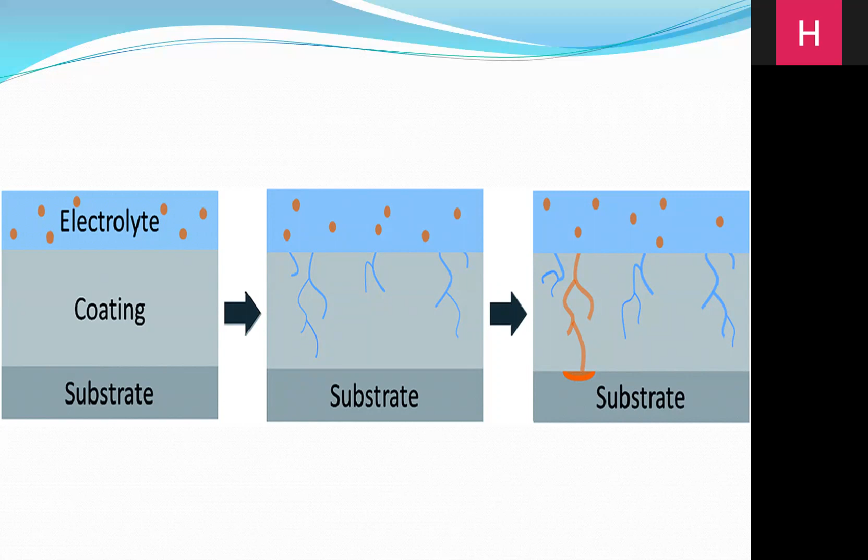Coming to the next slide, organic solvents perform several functions. They dissolve the resin, control coating viscosity and evaporation for film formation, and affect film adhesion and coating durability.

Other additives and fillers provide coating uniformity and improve coating flow, surface drying, or decrease the permeability of water and oxygen. Metal surface pre-painting treatments such as phosphate and chromium conversion coatings are applied to increase adhesion and the strength of the organic coating.

Before applying the top coat, it may be necessary to apply a primer coat. If you are applying a coating to the material, first you need to apply a primer coat. Then you need to apply a beneficial coat, meaning a stronger coat. Then it will be good for the component, as it possesses inhibitive properties and good surface adhesion. About solvents, which are the organic solvents involved.

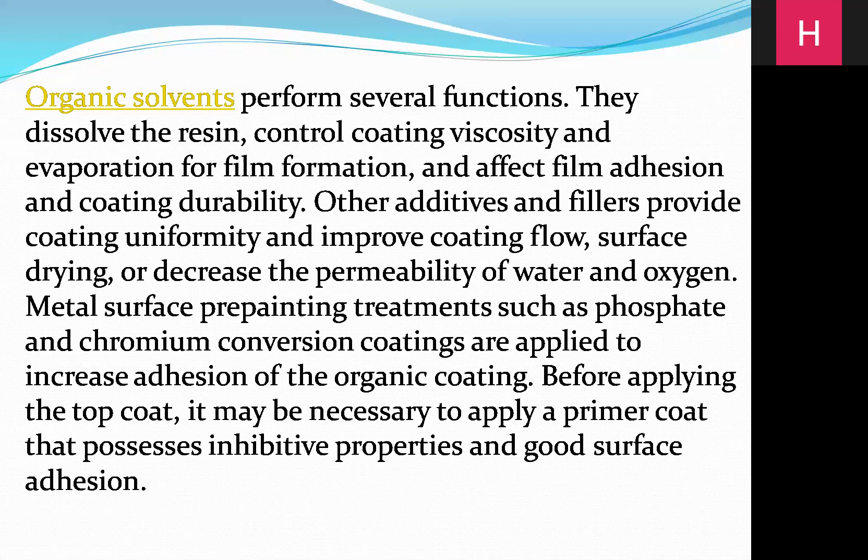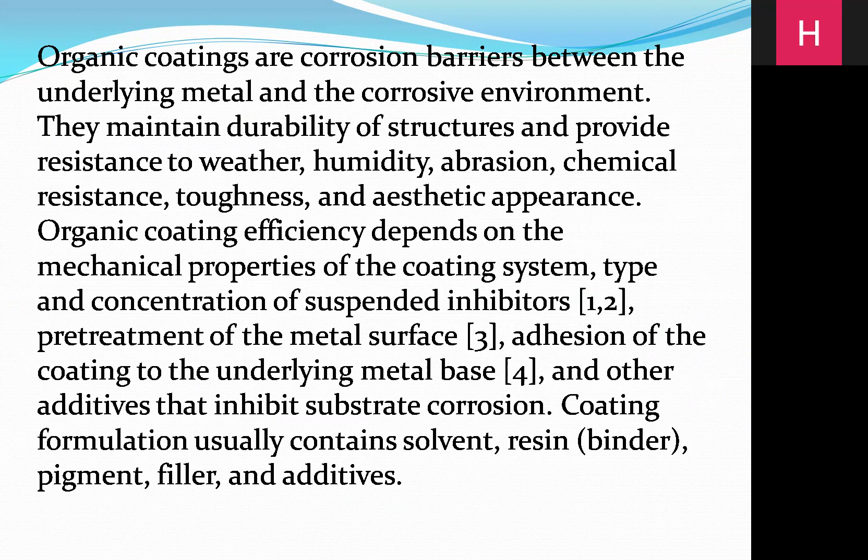As you have observed in the figure, organic coatings are mainly corrosion barriers between the underlying metal and the corrosive environment. They are mainly used to protect the component or metal from the corrosive environment, because if it is not coated and is exposed to the environment, the metal will corrode due to the air and will not last for many years.

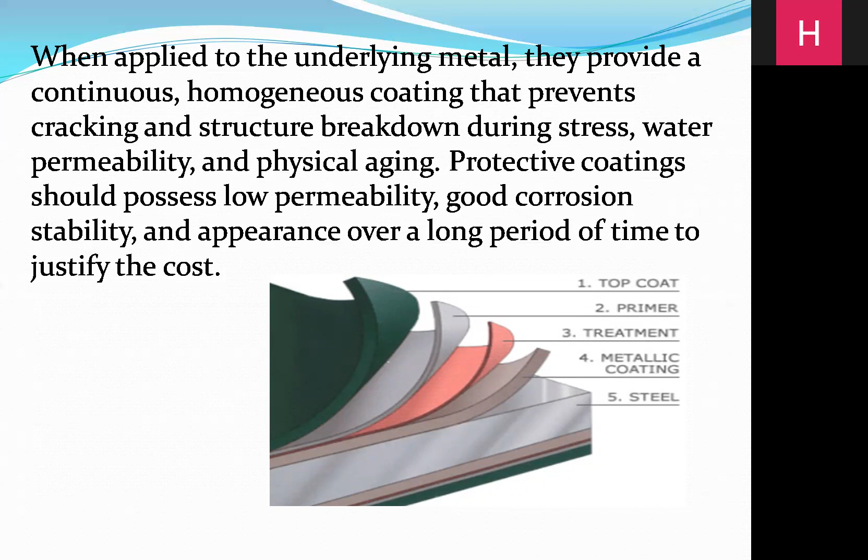There may be 5 or 6 processes, as we can extend as we wish, because for it to last a long period we can apply more than two or three coatings depending upon the metal we choose. Here you can see the properties mainly depend on single-component and two-component formulations. Single component mainly includes organic coatings, and two-component organic coatings are mainly phenolics and polyurethanes. You can see in the slide.